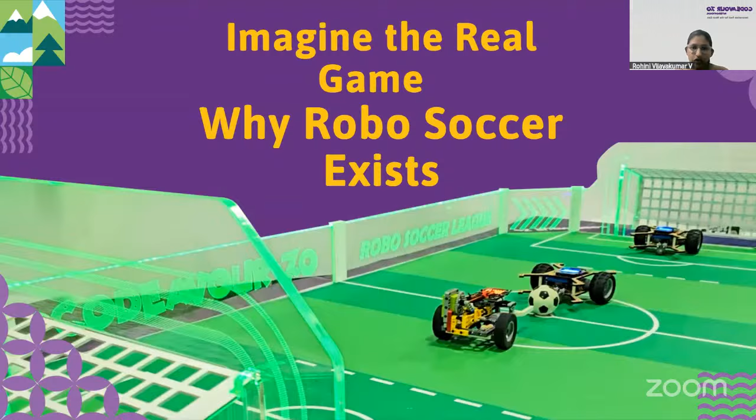Let's start with the Robo Soccer game. Imagine what things you need to cover while conducting or participating in this game. There will be many similarities between actual football and robo soccer: two sets of teams, two courts, and a half time provided. Instead of humans playing, here we'll use robots, so you can make your robot able to complete the Robo Soccer game. We'll discuss the tricks and tips you need to keep in mind while creating the robot soon in the upcoming slides.

So why the Robo Soccer game? We are implementing this for the first time this year - it's completely new. What we're trying to implement is that learning should be fun. Kids are currently learning many things related to robotics and AI, so how can we implement that knowledge in a fun way? We provided this track and arena where kids will be able to build the robot, code it, and once that's done, they'll also be able to play with it.

So it will be more fun for them to work on this activity. In this Robo Soccer game, they can code it, and once the coding is done, they'll be able to test it.

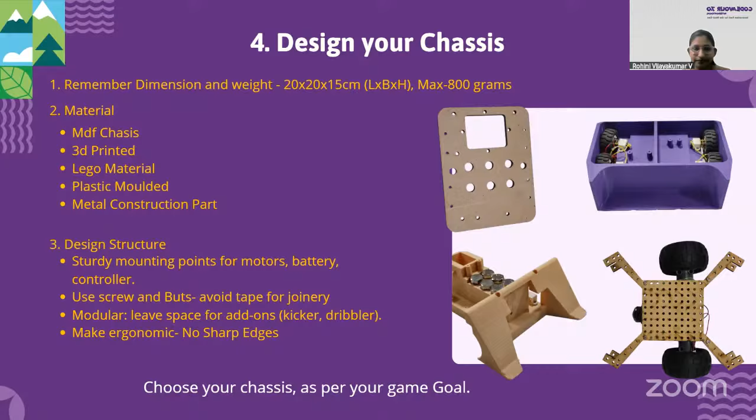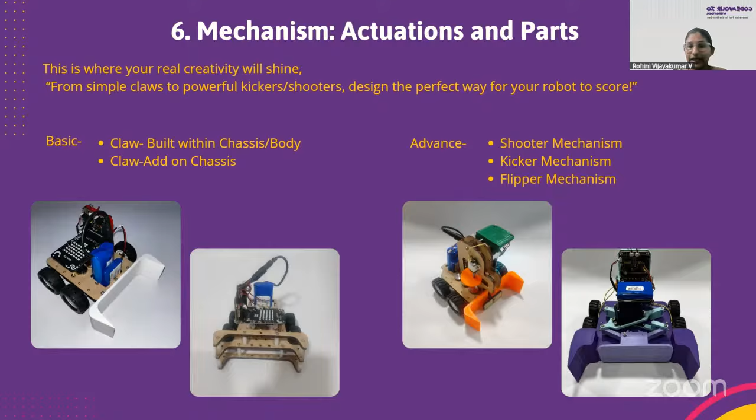I'll show you in the pictures. So here in the first robot, this one is just a basic robot with a claw. You can create it with the PictoBlox and the Quarky. I added the Quarky as well as the Quarky extension board, and I connected it with the battery. I created a space for battery here, and I only have this claw here. So I need to control it - in the coding, you can code it in a way that you will be able to control it by using the wireless connection. So if you wanted to use the Dabble software, you can use it, or else if you wanted to control it by using the sprites in the PictoBlox, that also works.

In this robot, the claw movements are there, but the entire body comes along with the claw. Here we are externally connecting the claw, but in these pictures, the claw is coming along with the body.

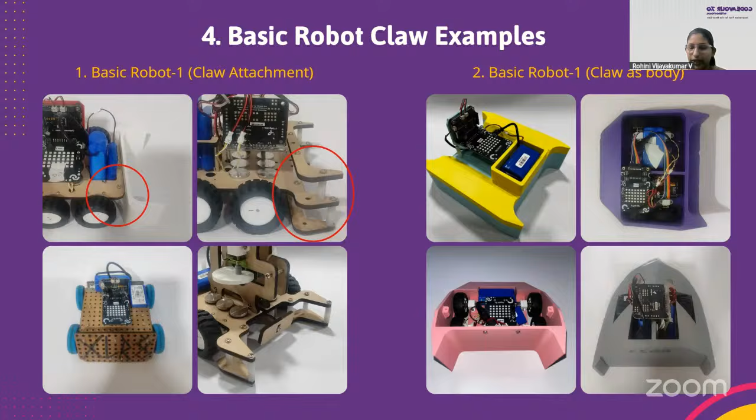So all these are 3D printed robots. If you want to create the 3D printed version, you can. If you want to use MDF, you can have that. And if you have plastic chassis, that also works.

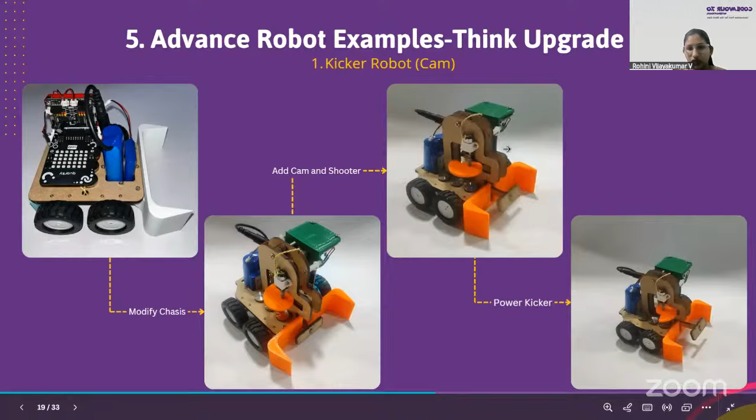If you want to make it that way, that also works, or if you want to add a servo motor here, that also works. The servo can tackle the same action. This mechanism is cam, whereas here it's done by servo motor. Here I added two sets of servos flipping the ball.

You can see it in the picture: the claw is barely touching the ball, so it doesn't have enough space to completely hold it. While making your robot, the measurement should be such that it covers about 1/3 of the ball.

This one is the shooter robot with cam technology. Again we are controlling the movement using these connected gears, so it's continuously rotating. Either you can use servo motors, or you can simply use this cam mechanism.

Here also the claw is connected with a shooter, so it pushes the ball and helps push the ball forward. Here also it's the same, using a servo again that kicks the ball.

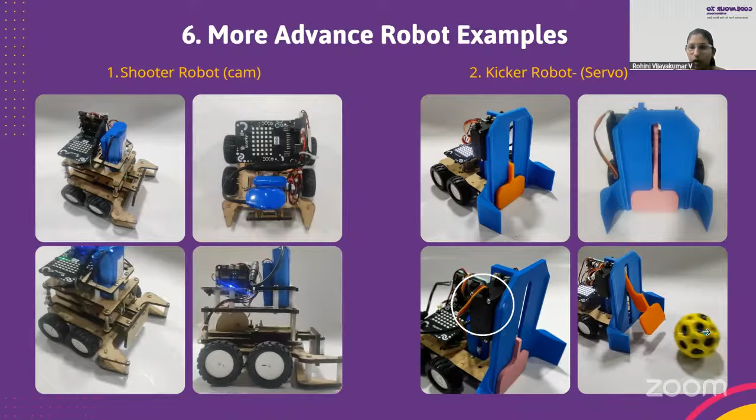This particular robot is made from Lego parts. You can see these components connected. If you want to integrate the servo, you can, or if you want to integrate the cam technology, you can also integrate that mechanism.

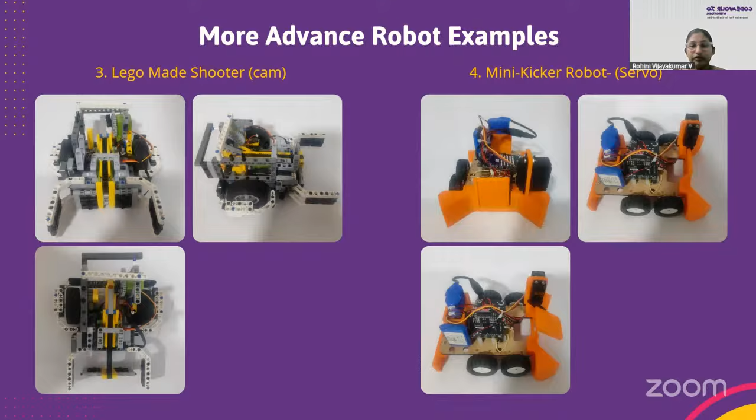This one is a mini kicker robot using only one set of servo. If you want to make the part more stable, you can use a scissor kind of mechanism, again connected with the servo motor.

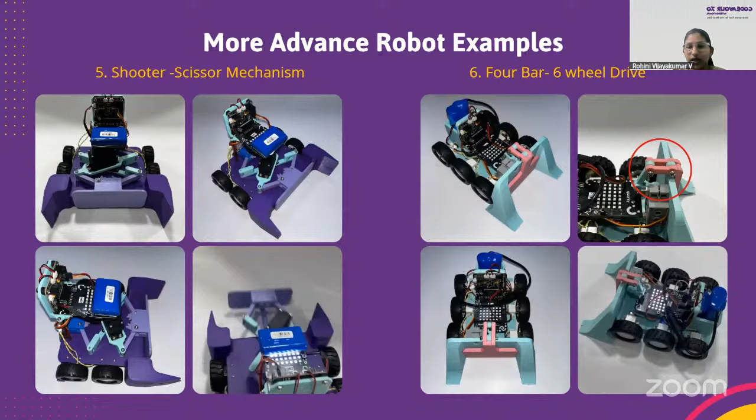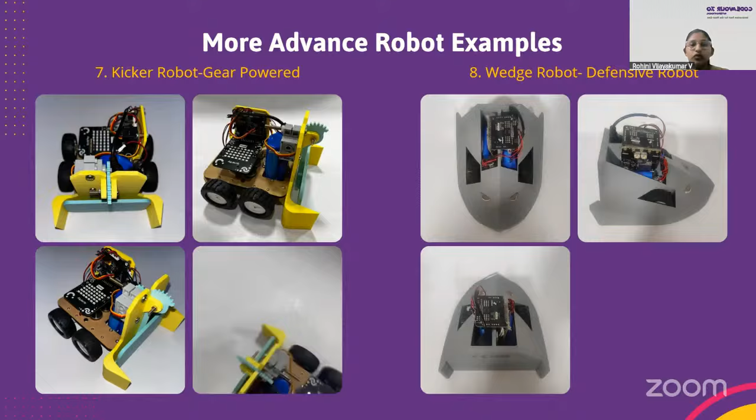It's up to your imagination and your strategy. You can make variations and changes to your robot that will help you win during the game.

This particular robot is completely closed; you can even cover it with extra parts. But make sure you'll be able to take the batteries and other parts outside during inspection prior to the game, so keep the batteries in an easily accessible place.

You need to be able to change it, so you can't completely cover your robot. There will be some inspection prior to the game, so you need to be able to open it. Make it a removable part.

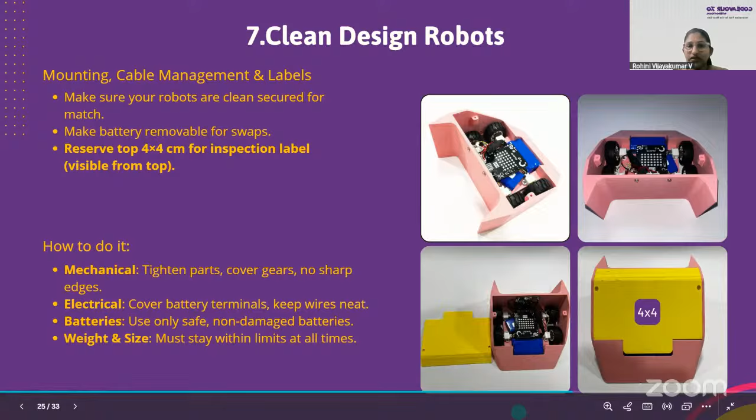The ball should be free falling, moving independently. You can push it, but you can't hold it during the game. In actual football we hold the ball using our legs, but here you can't hold it - you can only push it to control the direction.

You can use a 360-degree servo or a 180-degree servo; it's up to your wish what kind of part you need to use.

Catching is not allowed. You can't catch the robot's ball because the closed sides should only come to about 1/3 of the ball, so you are not allowed to catch or hold the ball.

So there will be some walls around the arena. We'll be making sure that the balls are staying inside the arena itself, the track itself. But if somehow anybody is kicking, like in the shooting robot, if you kicked the ball but it went outside, it will be considered a foul because the ball should be on the ground and free falling.